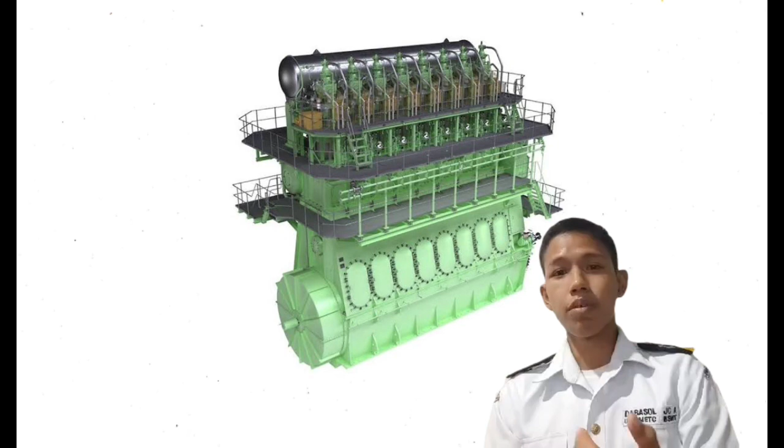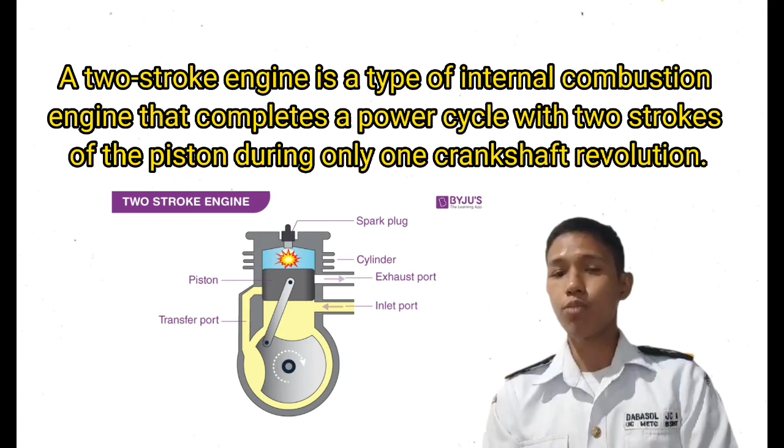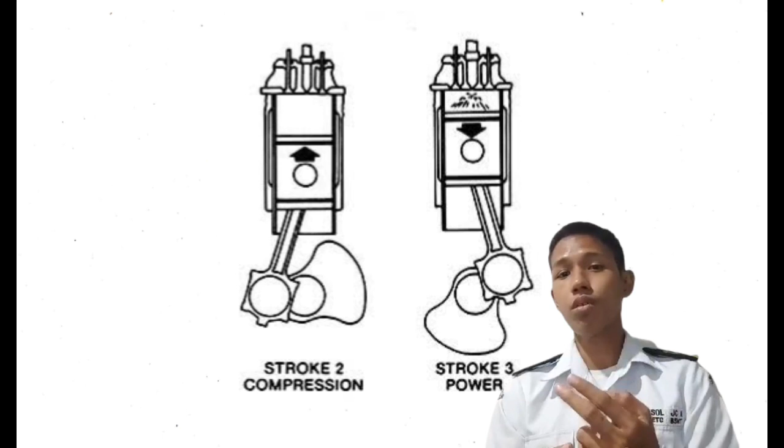So first, what is a two-stroke engine? A two-stroke engine is a type of internal combustion engine that completes a power cycle by moving one piston up and down once within a single power cycle, which is accomplished by turning the crankshaft once. In two-stroke engines, there are no suction and exhaust strokes. There are only two remaining strokes, the compression stroke and the power stroke. These are usually called the upward strokes and the downward strokes. Also, instead of valves, there are inlets and exhaust ports in two-stroke engines.

Now, what are the working principles of a two-stroke engine? Well, there are mainly two principles: the upward stroke and the downward stroke. For further explanation, I'm going to leave that to the next reporter.

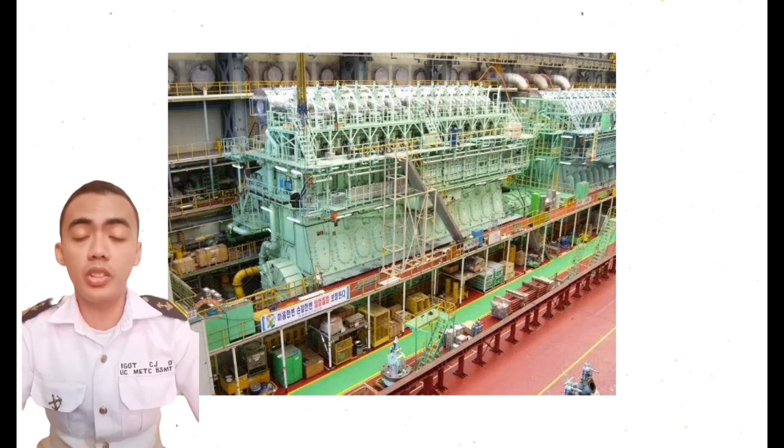Good day, I am one of the presenters of this group, and our topic is the working principle of two-stroke engines. A two-stroke engine is a type of internal combustion engine which completes a power cycle with two strokes of the piston during only one crankshaft revolution. So in a two-stroke engine, there are no suction and exhaust strokes. There are only two remaining strokes, the compression stroke and power stroke. These are usually called upward and downward strokes.

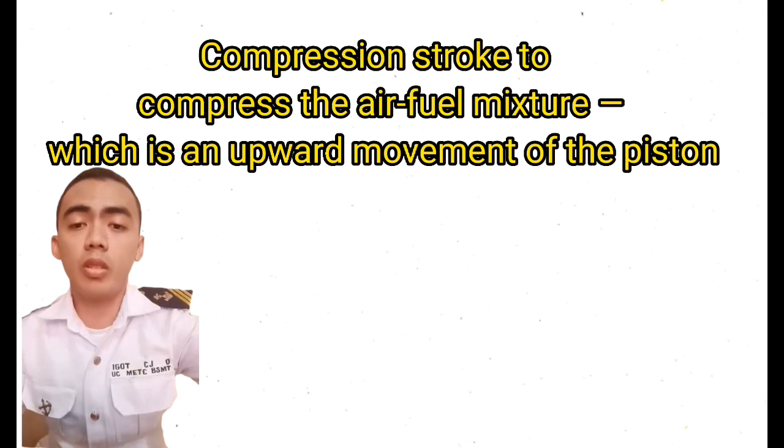So my task is to discuss the compression stroke or upward stroke. During the upward stroke, the piston moves upward from the bottom dead center to the top dead center by compressing the charged air-petrol mixture in the combustion chamber of the cylinder. Due to the upward movement of the piston, a partial vacuum is created in the crankcase, and a new charge is drawn into the crankcase through the uncovered inlet port. The exhaust port and transfer port are covered when the piston is at the top dead center position, and the compressed charge is ignited in the combustion chamber by a spark given by the spark plug.

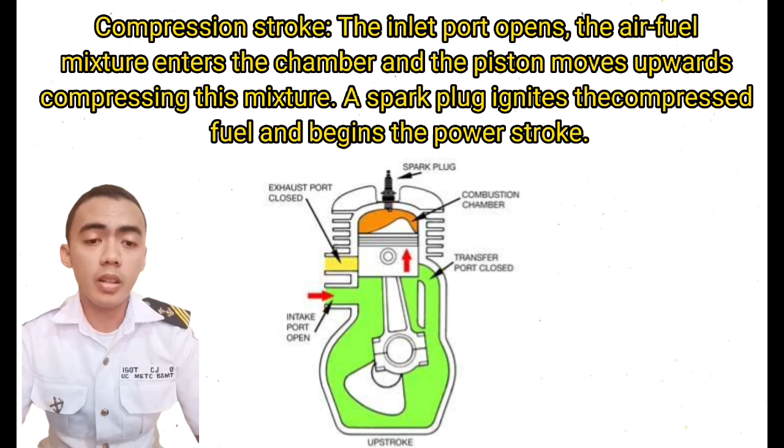I'm here to explain the two-stroke upward stroke, which is the upward movement of the piston to draw fresh air inside and then compress the air-fuel mixture. Due to this compressing action, the air-fuel mixture ignites and an explosion takes place, which pushes the piston down. As the piston goes down, it uncovers the scavenge ports and fresh air comes inside. At the same time, the exhaust opens and the waste exhaust gas is removed by the assistance of scavenging. As the piston moves up, the compression stage followed by these two strokes keeps on repeating unless the fuel supply to the cylinder is cut off. So that's all.

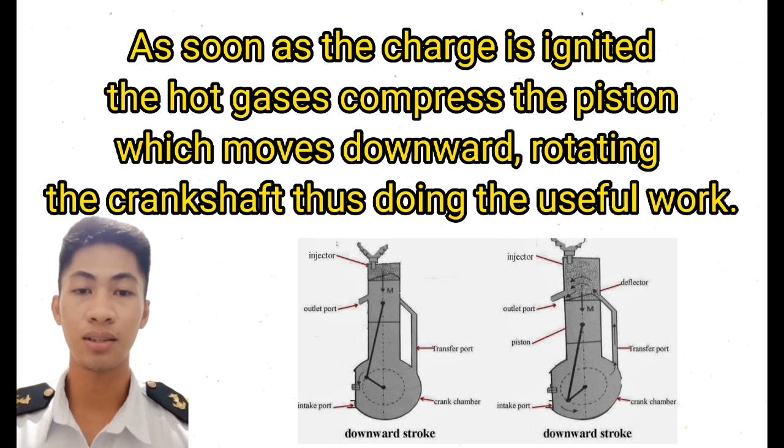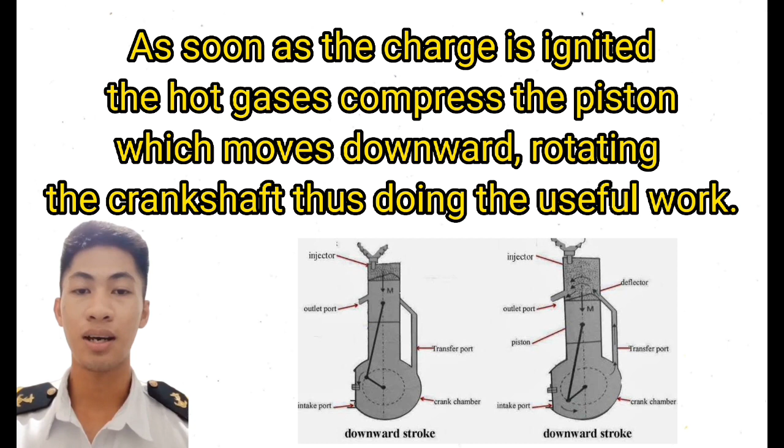So when the charge ignites, the hot gases push the piston, causing it to descend downward and cause the crankshaft to rotate, performing the necessary work. The piston covers the inlet port during this stroke, compressing the new charge inside the crankcase. The transfer port and exhaust ports are first opened when the piston continues to descend, and as a result, the exhaust begins at the exhaust port. The charge through the transfer port is pushed into the cylinder as soon as it is opened. Most of the exhaust gases are forced out of the cylinder by the charge once it hits the deflector on the piston's crown. The piston is now positioned at bottom dead center. Despite being partially filled with exhaust fumes, the cylinder is entirely filled with a new charge. Then, with the piston making two strokes for every crankshaft turn, the cycle repeats.

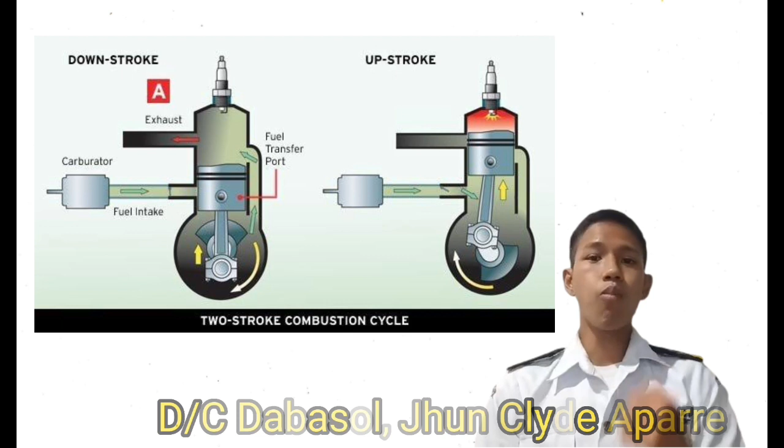Hello, once again I'm Deck Cadet Dabasol Jhun Clyde. Now, for a more thorough justification of the piston's motion: the piston moves upward during the compression stroke, which compresses the air-fuel mixture, while the crankshaft is subjected to a turning force due to the downward push of the expanding gas. The piston moves upward during the exhaust stroke to remove the used gases. So the downward piston stroke causes the crankcase to compress. The increased pressure inside the crankcase forces the valve to close. And that is all for the principle of the two-stroke engine.

Now, to wrap this whole topic up, how advantageous is the two-stroke engine over the four-stroke engine? Well, it is because in a ship, they can be run either clockwise or counterclockwise. Ships don't have gearboxes. If you need to back your ship up, you have to shut the engine down and restart it going to the other direction, which is astern. You can't do that with a four-stroke engine. So two-stroke engines can burn lower-quality fuel than four-stroke engines due to slower speed, saving ships a lot of fuel cost. It's a major operating expense, so it is crucial to be able to use the cheapest fuel.

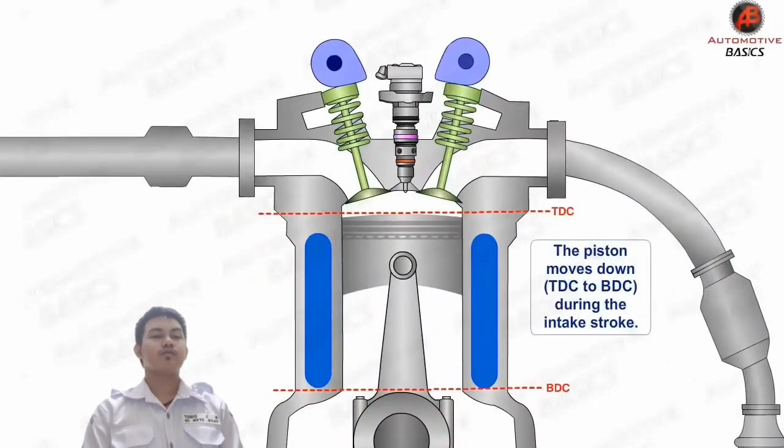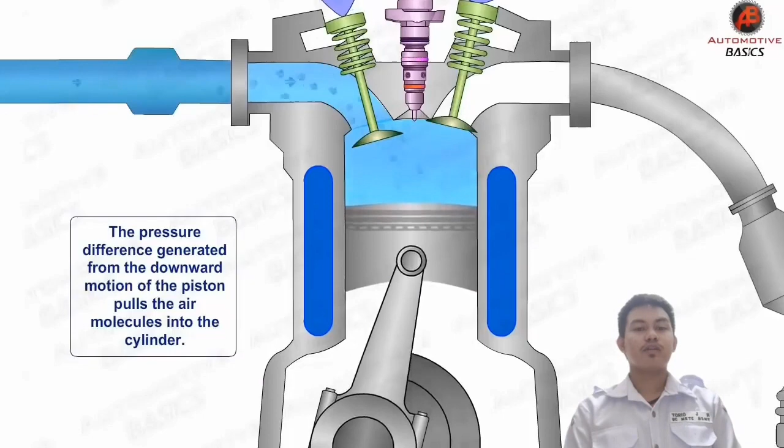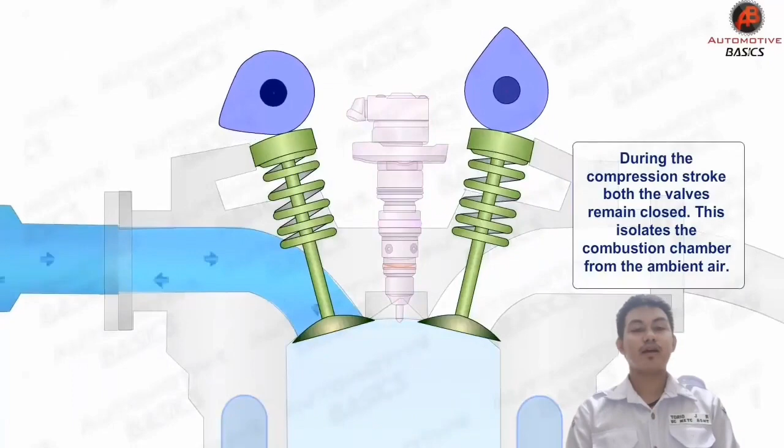A four-stroke engine is also called an internal combustion engine. It utilizes pistons that complete 4 separate strokes while turning the crankshaft: intake, compression, combustion, and exhaust.

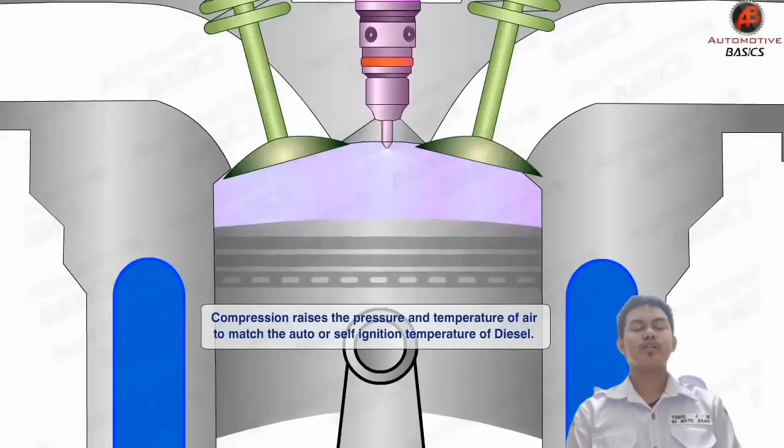Completing these strokes results in 1 operating cycle. A complete operation in a four-stroke engine requires 2 revolutions of the crankshaft to finish one full cycle.

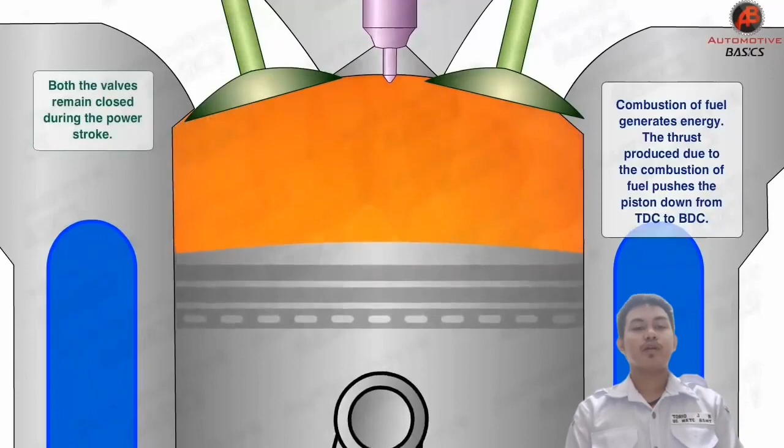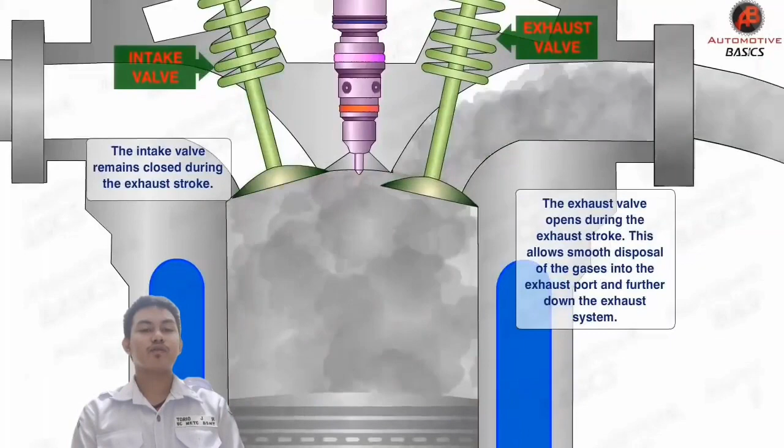A stroke refers to the full travel of the piston along the cylinder in either direction. Most modern internal combustion vehicles are four-stroke, powered by either gasoline or diesel fuel. Four-stroke engines deliver a good balance of power, reliability, and efficiency.

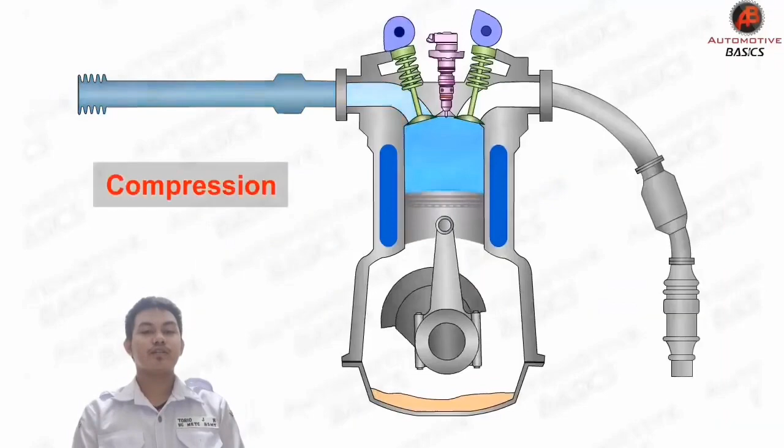I'll be talking about the first step in the four-stroke process, the intake stroke. First, the intake valve opens and the exhaust valve closes. After that, the air-fuel mixture is introduced into the combustion chamber.

In this stroke, the piston at TDC, the top dead center position farthest from the crankshaft, begins to move towards BDC, the bottom dead center, the position nearest the crankshaft. This movement creates a low pressure area in the cylinder where air will be sealed.

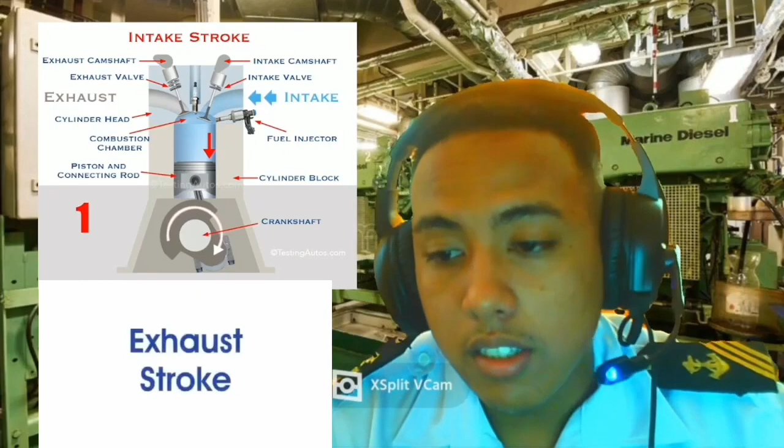The inlet valve, responsible for suction and discharge during the stroke, opens for a few degrees of crankshaft rotation after BDC. After that, the intake valve closes, and the air-fuel mixture introduced in this step is sealed inside the cylinder.

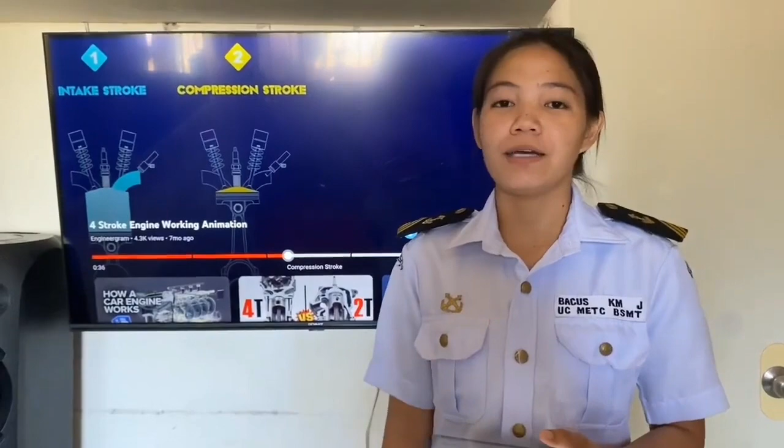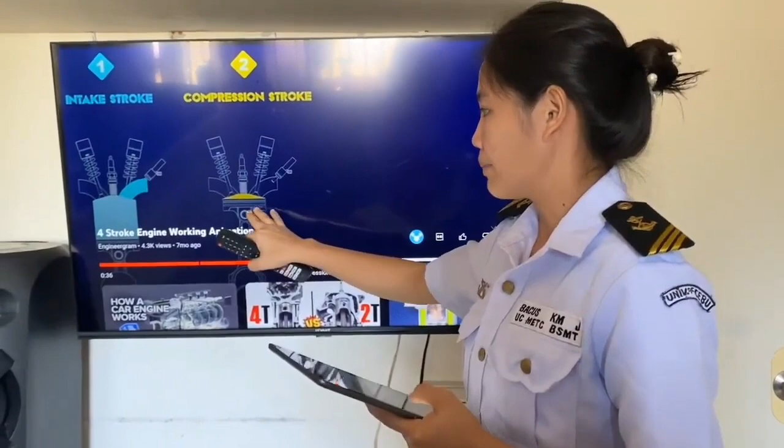Good day everyone, I am Cadet Bacus Crystal Meiji, and I'm here to present the compression stroke. As you can see on the screen, this shows the compression stroke, from BDC to TDC. I will explain what compression stroke is.

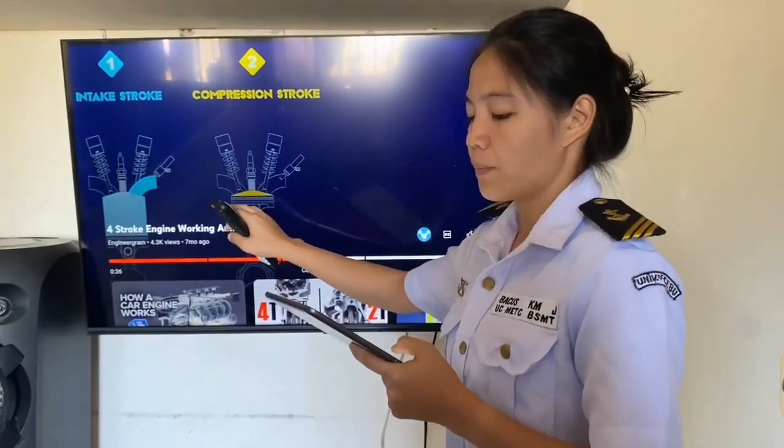In the compression stroke, the trapped air-fuel mixture is compressed inside the cylinder. During the stroke, the piston moves from BDC to TDC, compressing the air-fuel mixture inside the cylinder.

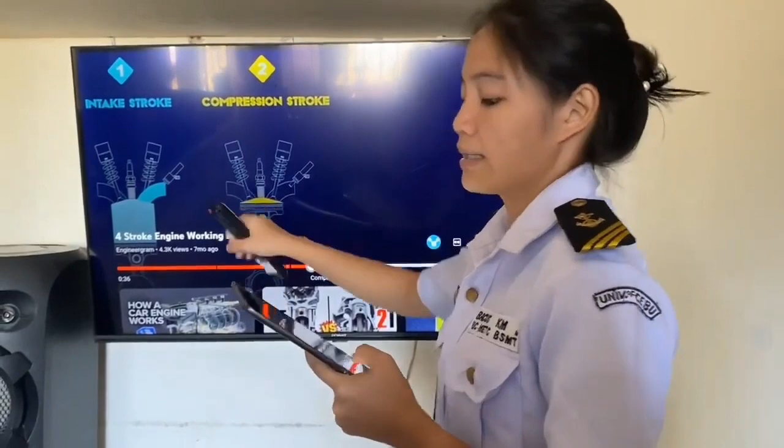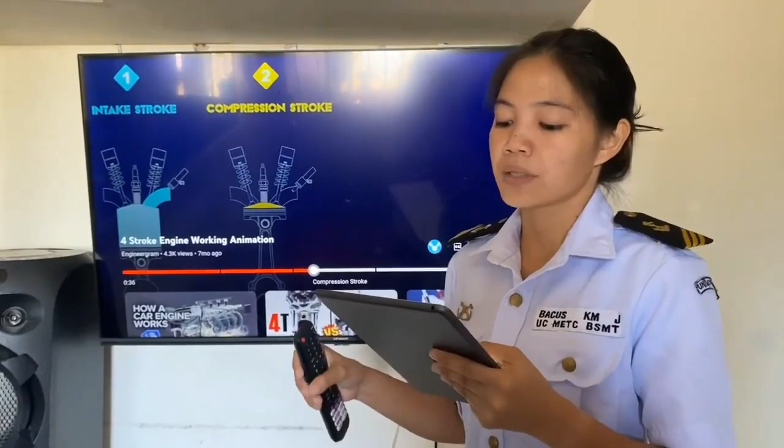The momentum of the flywheel helps the piston move forward. Compressing the air-fuel mixture allows more energy to be released when the charge is ignited. The charge is the volume of compressed air-fuel mixture trapped inside the combustion chamber, ready for ignition.

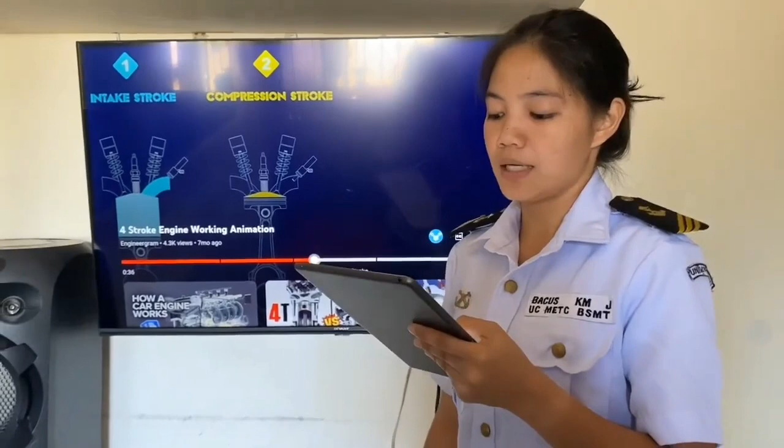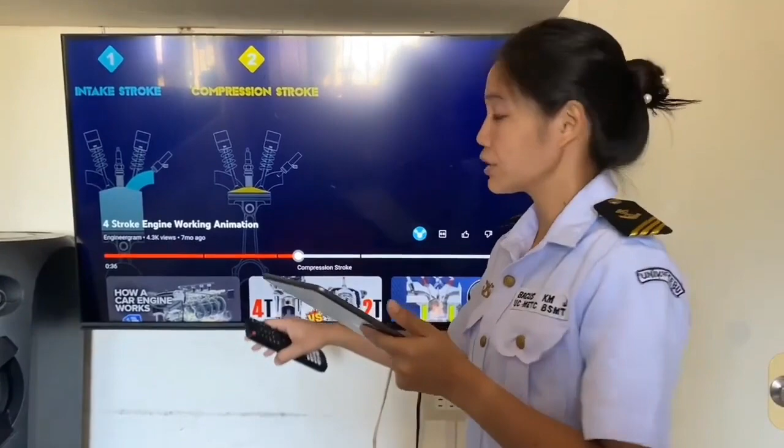The inlet and outlet valves must be closed to ensure the cylinder is sealed, resulting in compression. This is the key point: both inlet and outlet valves are closed. The crankshaft rotates 180 degrees, for a total of 360 degrees.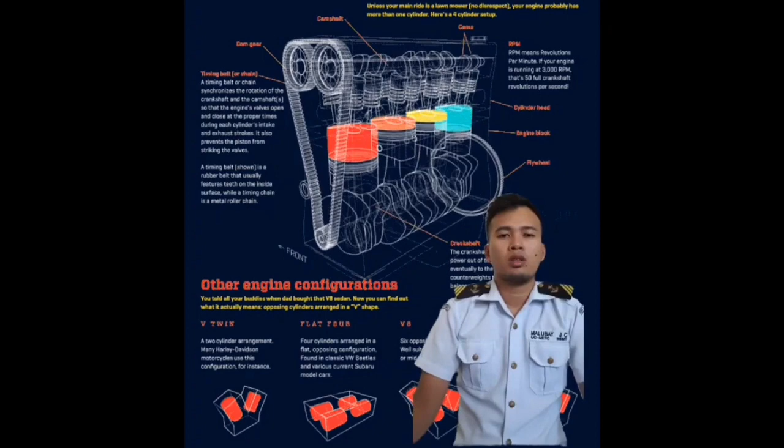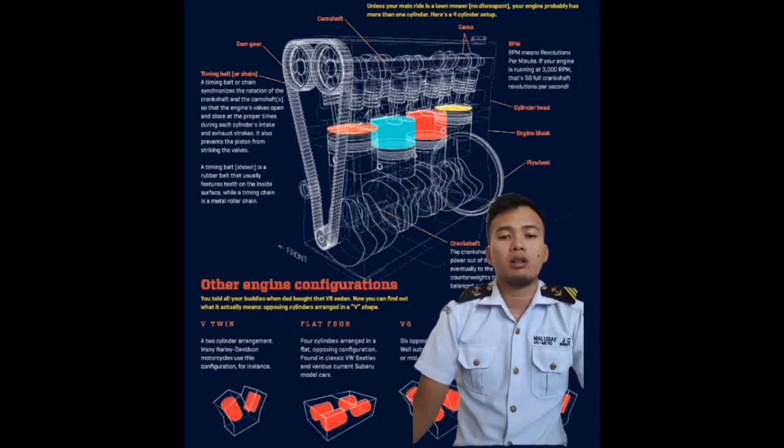Power and combustion stroke: the second rotation of the crankshaft begins when it completes a full rotation during the compression stroke. The power stroke occurs when the compressed air-fuel mixture is ignited with the help of a spark plug. The power stroke happens when the spark plug fires, the air-fuel mixture burns, and an immediate flame is created.

Let's proceed to the combustion stroke. Ignition or combustion is a rapid, oxidizing chemical reaction in which fuel chemically combines with oxygen in the atmosphere and releases energy in the form of heat.

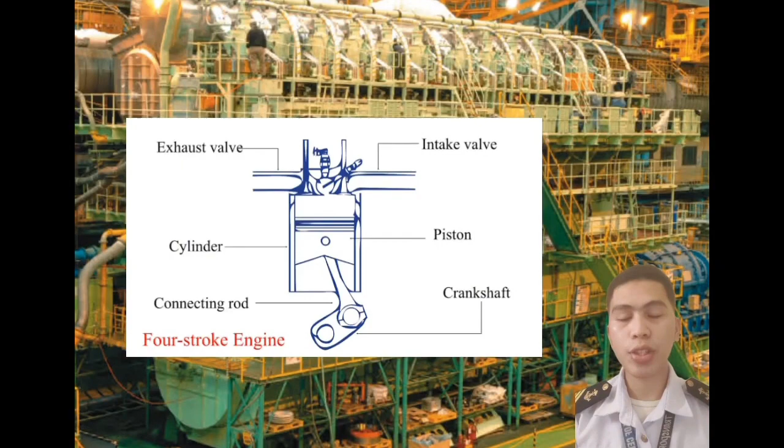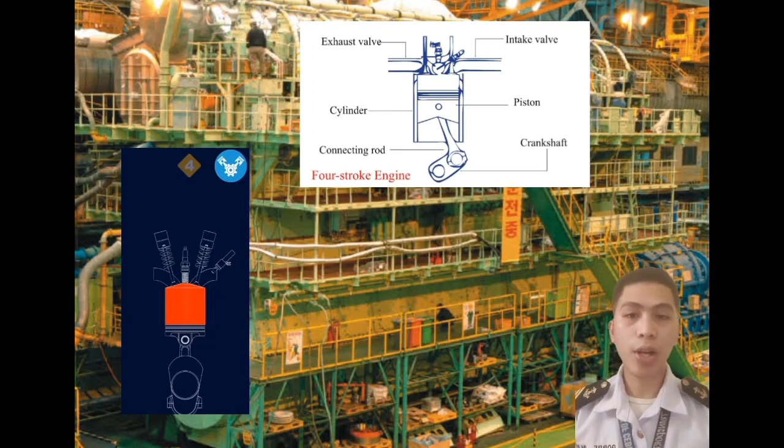Good day. Now I'm talking about the exhaust stroke, the fourth basic component of the four-stroke engine. As the piston reaches BDC, the bottom dead center, during the power stroke, combustion is complete and the cylinder fills with exhaust gases, and the exhaust valve opens during this stroke.

The inertia of the flywheel and other moving parts pushes the piston toward TDC, the top dead center. The piston moves upward, forcing the exhaust gases out through the exhaust valve. At the end of the exhaust stroke, the piston is at TDC, and one cycle has been completed.

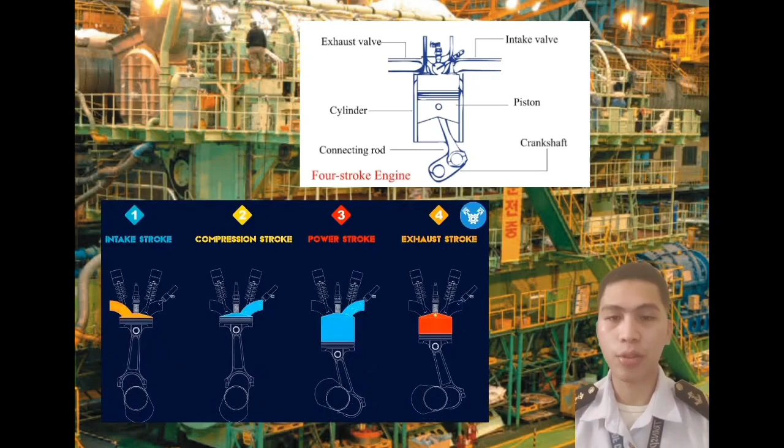It then returns to the first cycle: intake, compression, combustion, and exhaust.

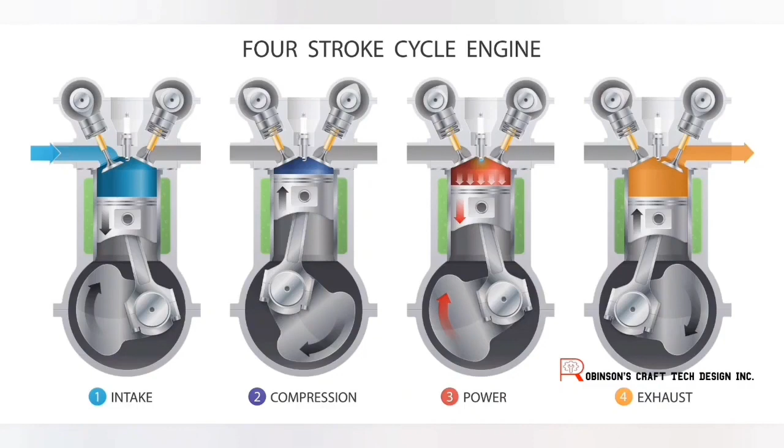The four separate strokes are termed intake, also known as induction or suction. This stroke of the piston begins at top dead center (TDC) and ends at bottom dead center (BDC). In this stroke, the intake valve must be open while the piston pulls an air-fuel mixture into the cylinder by producing vacuum pressure through its downward motion.

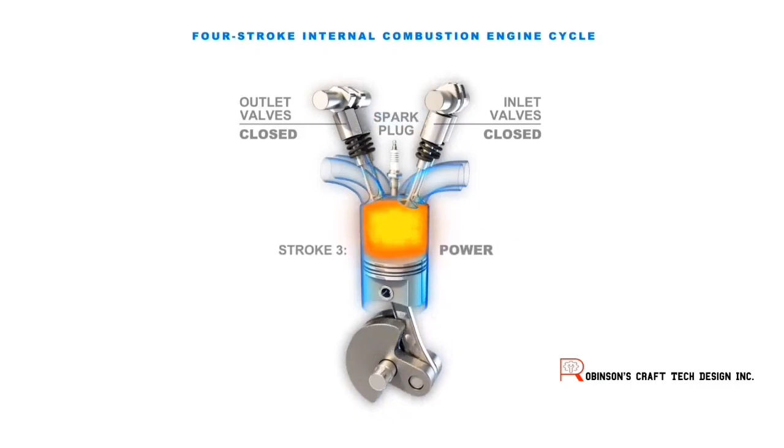Compression. This stroke begins at BDC, just at the end of the suction stroke, and ends at TDC. In this stroke, the piston compresses the air-fuel mixture in preparation for ignition during the power stroke, below.

Combustion, also known as power or ignition. This is the start of the second revolution of the four-stroke cycle.

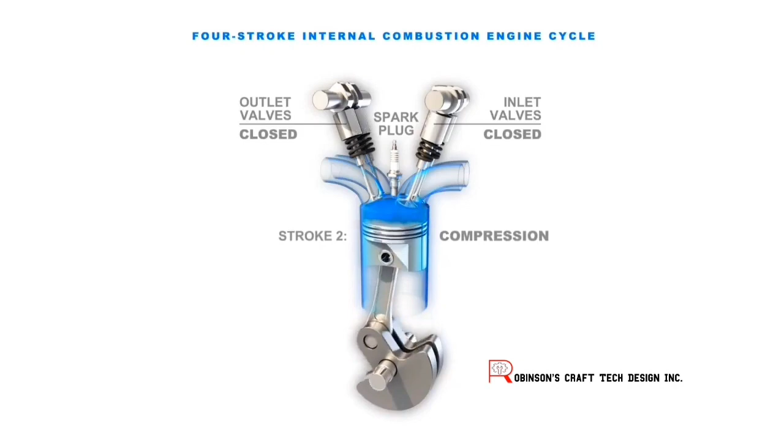Exhaust, also known as outlet. During the exhaust stroke, the piston once again returns from BDC to TDC while the exhaust valve is open. This action expels the spent air-fuel mixture through the exhaust valve.

First and foremost, we'll start by discussing what a two-stroke engine is. A two-stroke engine is a type of internal combustion engine that completes a power cycle with two strokes of the piston during one power cycle.

This power cycle is completed in one revolution of the crankshaft. As the name implies, the two-stroke engine only requires two piston movements, up and down, in order to generate power. The engine is able to produce power after one cycle because the exhaust and intake of the gas occur simultaneously.

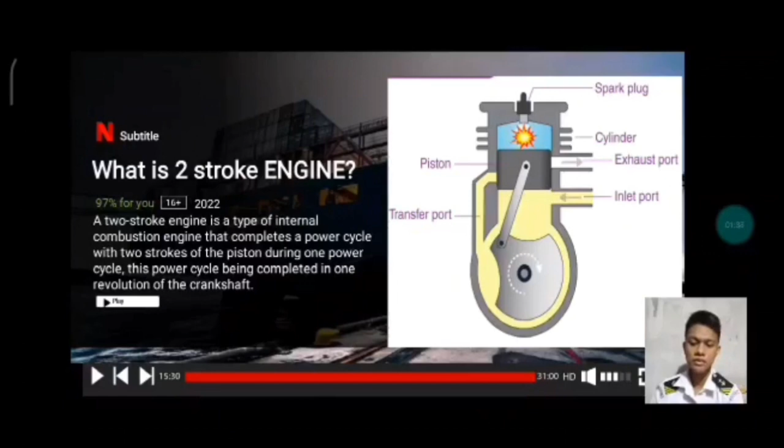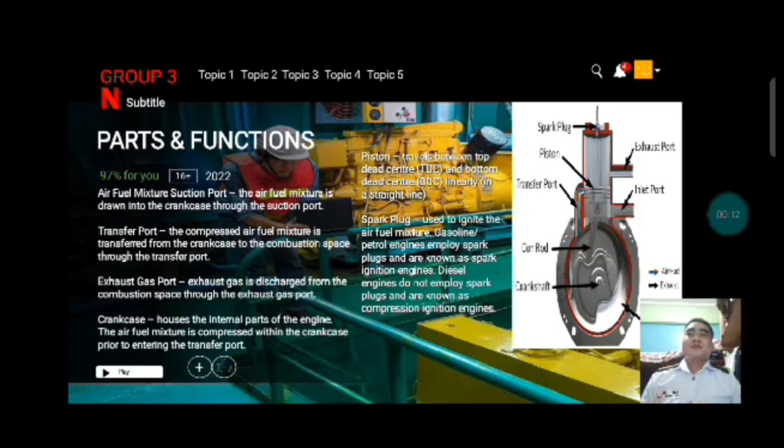Parts and functions. First, the air fuel mixture suction port: the air fuel mixture is drawn into the crankcase through the suction port.

Second, the transfer port: the compressed air fuel mixture is transferred from the crankcase to the combustion space through the transfer port.

Third, the exhaust gas port: exhaust gas is discharged from the combustion space through the exhaust gas port.

Lastly, the crankcase: it houses the internal parts of the engine. The air fuel mixture is compressed in the crankcase prior to entering the transfer port.

These are the parts: spark plug, piston, transfer port, connecting rod, crankshaft, exhaust port, inlet port, and the crankcase. This is the movement of the engine.

This is the function. The piston travels between top dead center (TDC) and bottom dead center (BDC) linearly, in a straight line. Second, the spark plug is used to ignite the air fuel mixture.

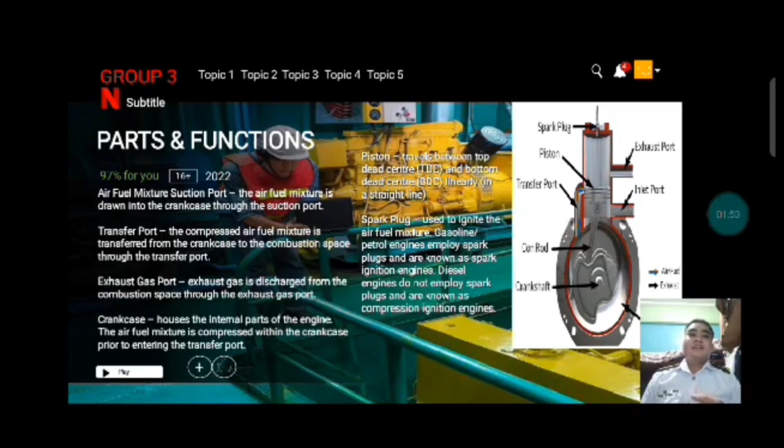Gasoline and petrol engines employ spark plugs and are known as spark ignition engines. Diesel engines do not employ spark plugs and are known as compression ignition engines. That's all.

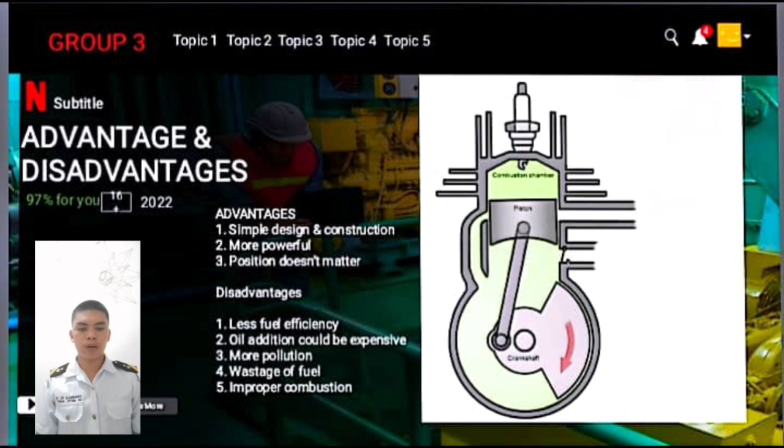Lastly, improper combustion. The exhaust gases get trapped inside the combustion chamber. This makes the fresh charge impure. Therefore, maximum power doesn't get delivered because of improper, incomplete combustion. That's all. Thank you.

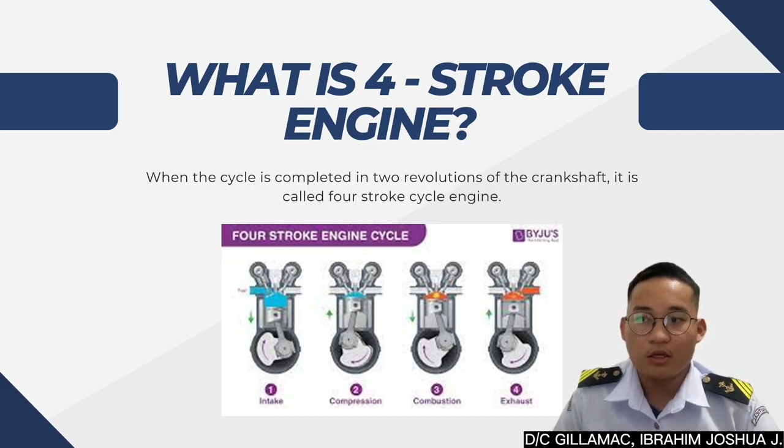The intake stroke brings air and fuel into the combustion chamber. The compression stroke compresses the air-fuel mixture. The power stroke ignites the mixture and produces the power to drive the ship's propulsion system. The exhaust stroke removes the spent gases from the combustion chamber.

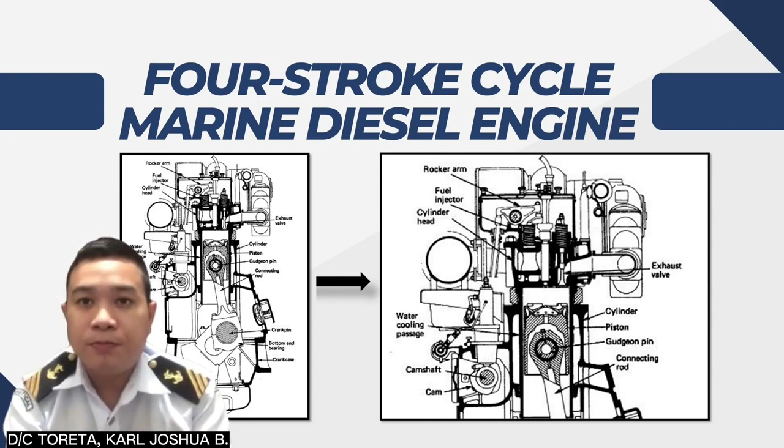So as you can see, there are three parts of a four-stroke engine. First is the crank pin, also known as a rod bearing journal. It's a mechanical device in an engine which connects the crankshaft to the connecting rod for each cylinder.

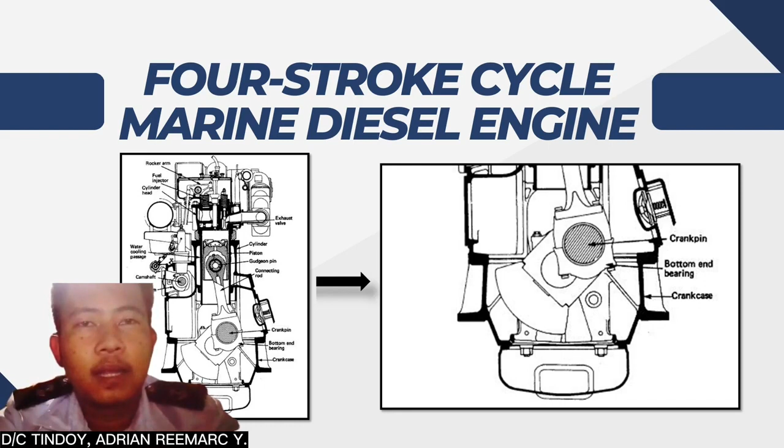Next is the crankcase, which often forms the upper half of the main bearing journals, with the bearing caps forming the other half. The last one is the bottom end bearing, a bearing at the larger crankshaft end of the connecting rod in an engine.

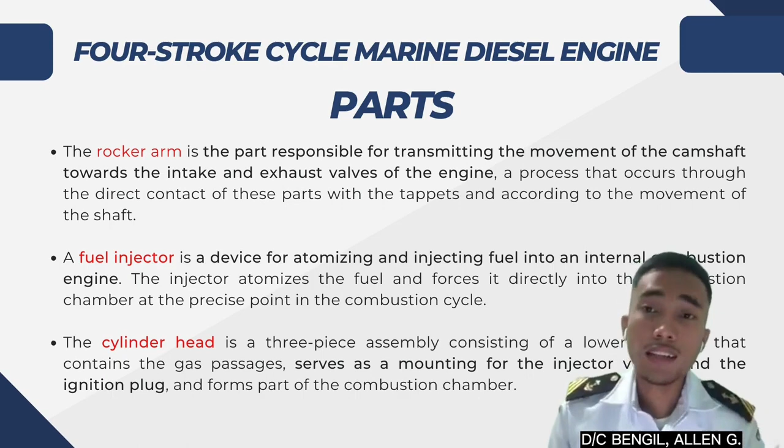Water-cooled systems use a liquid, usually water, pumped through pipes. The liquid takes the heat from the component and dissipates it in the radiator. Meaning the coolant that came from inside the engine will collect the heat from it and then move through pipes into the radiator, and the radiator will release or take away the heat that the coolant carried.

So the water cooling passage operates on the same principle as the engine cooling system in a car, where coolant is pumped through the engine and to the radiator. The next part of a four-stroke engine is the camshaft. The camshaft is a mechanical component of an internal combustion engine.

The function of the camshaft is to open and close the inlet and exhaust valves of the engine at the right timing, at the exact stroke, and in a precise defined sequence. A cam, in its simplest definition, is a mechanical link that converts rotational motion into linear motion or vice versa.

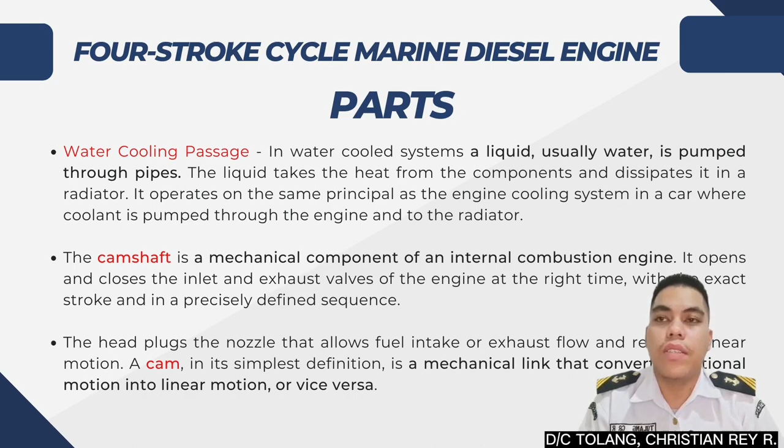Next part is the exhaust valve. The exhaust valve releases burned gases from the cylinder, and it closes during the initial part of the induction stroke. So the exhaust valve functions when combustion inside the cylinder is done and the burned gases need to be released.

Next is the cylinder. A cylinder is a crucial part of the engine where fuel is combusted, and power is generated. The cylinder consists of a piston and an inlet and exhaust valve at the top.

During the stroke, the piston moves from bottom dead center to top dead center, compressing the air fuel mixture. The momentum of the flywheel helps the piston move forward and compress the air fuel mixture, allowing more energy to be released when the charge is ignited.

In internal combustion engines, the gudgeon pin or piston pin connects the piston to the connecting rod and provides a bearing for the connecting rod to pivot upon the piston's movement.

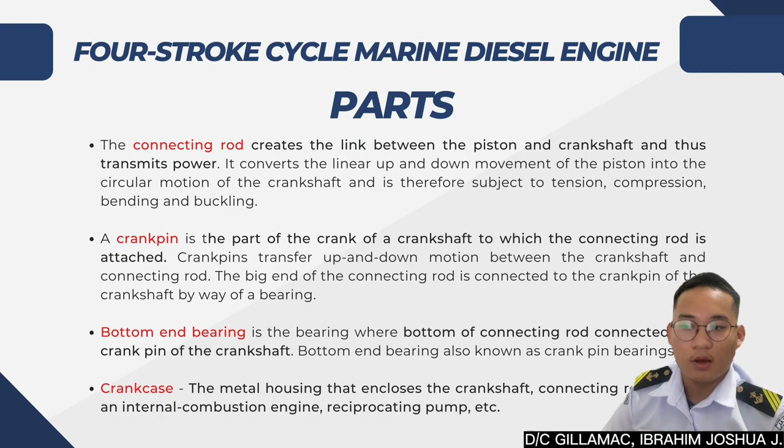Lastly, the crankcase: the metal housing that encloses the crankshaft, connecting rods, etc., in an internal combustion engine, reciprocating pump, and so on.

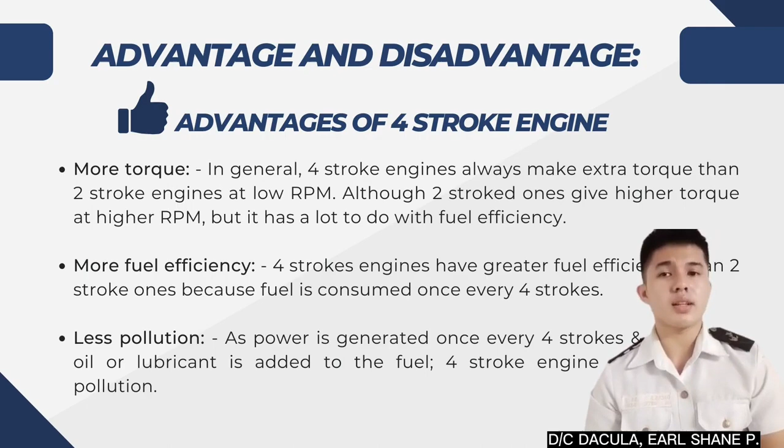Another advantage of the 4-stroke engine is more durability. We all know that the more an engine runs, the quicker it wears out. 2-stroke engines are designed for high RPM. If an engine can go for 10,000 RPMs before it wears out, a 4-stroke engine at 100 RPM will run for 100 minutes, while a 2-stroke engine with a higher RPM of 500 will run for only 20 minutes. So there's no extra addition of oil; only the moving parts need lubricant intermittently.

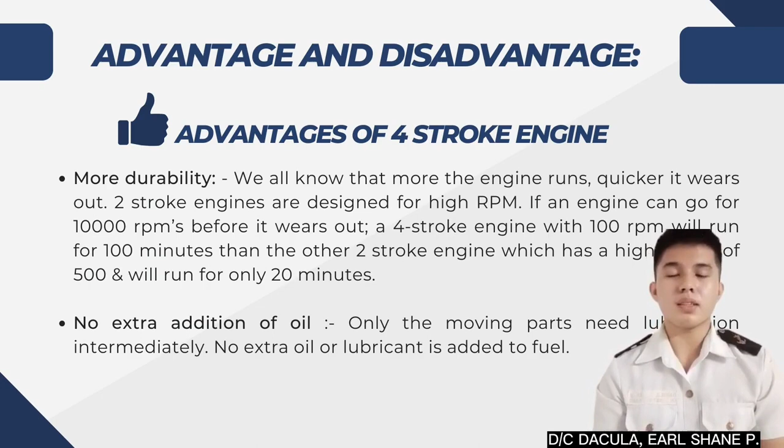No extra oil or lubricant is added to the fuel. And that's all.

Disadvantages of a four-stroke engine: complicated design. A four-stroke engine has complex valve mechanisms operated and controlled by gears and chains. Also, there are many parts to worry about, which makes it harder to troubleshoot.

Less powerful, as power gets delivered once every 2 rotations of the crankshaft, or 4 strokes. Hence, the 4-stroke is less powerful.

Expensive. A 4-stroke engine has much more parts than a 2-stroke engine. They often require replacement parts, which leads to greater expense.

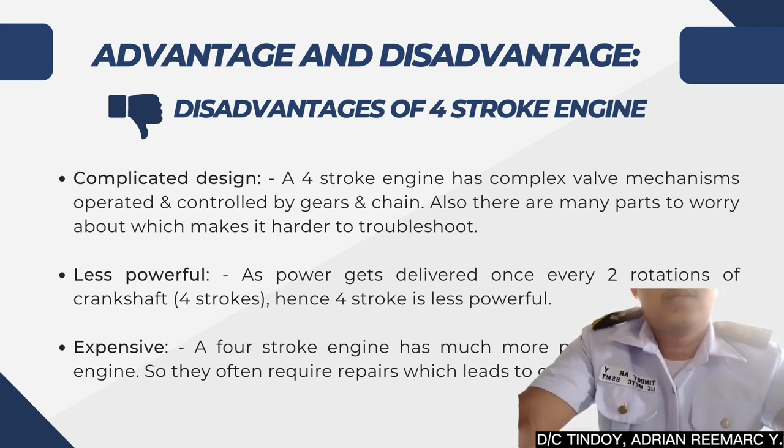2-stroke and 4-stroke engines are two different types of internal combustion engines. The main difference between the two lies in their design and the number of power strokes they produce per cycle. 2-stroke engines are lighter, more compact, and generally simpler in construction compared to 4-stroke engines. They complete a power cycle with just 2 strokes of the piston compared to 4 strokes in a 4-stroke engine, which results in faster power delivery.

However, this also means 2-stroke engines require a mixture of fuel and oil to be added to the fuel tank, as they don't have an oil sump to lubricate the engine. Additionally, 2-stroke engines are generally less fuel efficient, produce more pollution, and are typically noisier than 4-stroke engines.

4-stroke engines, on the other hand, are larger and more complex than 2-stroke engines. They have an oil sump that holds the oil used to lubricate the engine, and they are designed to operate on gasoline only. The 4-stroke engine provides better fuel efficiency, lower emission, and lower noise levels compared to 2-stroke engines.

So in conclusion, the choice between 2-stroke or 4-stroke engines will depend on the specific requirements of the application. While 2-stroke engines offer more power and are more compact, 4-stroke engines offer improved fuel efficiency, lower emission, and quieter operation.